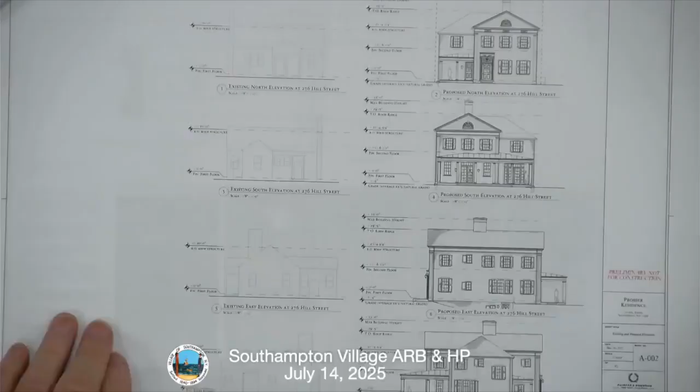And the new house, actually, the old house doesn't conform to the setbacks. So the new house actually is a smaller, narrower footprint than the old house, and does conform, as well as the pyramid laws. It sits more or less in the same location as the existing house, as you can see here.

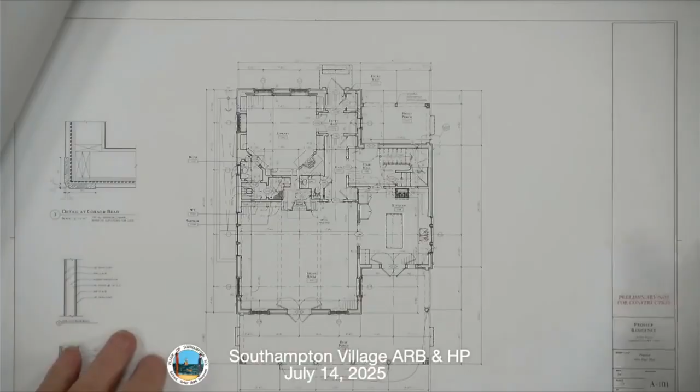Again, these are the plans. I'll go straight to the elevations. As you can see, it's not a vast house. It's basically a gable front house with the porch on the back and a small porch on the front. These are the front and rear elevations.

I'm going to stop there for one sec, because I think we saw this house last meeting. You did, and I think the client was here, and there was two questions. One is a question of the historic report and demo eval, which I'll get to in just a second. And the other was a question of whether you're going to leave the front of it, because was this the house that was part clapboard and then the rest of the house is shingle?

No, it wasn't clapboard, it's shiplap. And there was a question between you and the client of whether you're going to keep that facade request. We were keeping that request.

Okay, and then there was a question of whether the board felt that was appropriate. I apologize for my client, she was on anesthesia and was just coming out from the hospital.

Well, I think the real issue that came up was part of the board were not sure they felt shiplap on part of the house and shingle around the rest made the house look pretty formal for that area versus an all shingle house, and that, I think, was part of the discussion. And I think, if I remember correctly, you felt it was too formal.

Too fancy in a funny way. Well, it's not particularly fancy. Well, compared to the other two you showed at 268 and the other one. Well, those are directly adjacent.

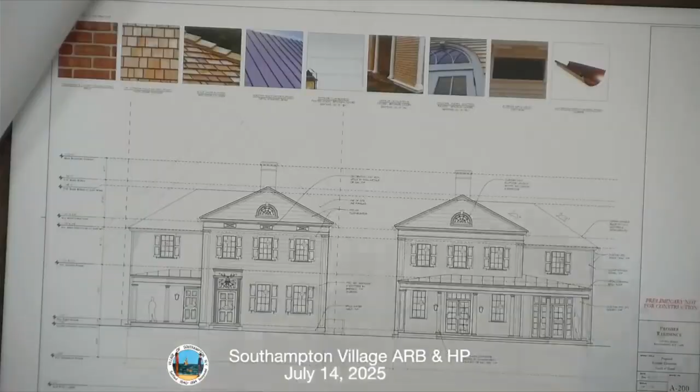Well, I disagree. We want it to fit into the neighborhood. That's what I'm saying. I have an issue that it is, in a sense, more city-fied than it should be.

Well, it is in the village. Yes, it's on Hill Street. I think we know where the house is. It's in the historic district. Because that rendering there...

What's that? Is that a photograph? That's a neighboring house, a house in town somewhere. Well, we're talking about right where it is. Okay, right down the street we have Whitefields. Do you have a rendering of this house?

Okay, we kind of went through this last meeting, so there's only two issues at hand here. The first is, do you have a rendering of this house in its proposed form? We do not. That's not a colored rendering, but we do have a streetscape.

I think our job is to sort of know the houses, and we looked at the house and we've driven up. I don't need to go back to the streetscape right now. The question comes down to, for all the board members, how we feel about having multiple materials, and is it a deal breaker or not? Do you have an opinion? We know some board members do, so I'm just going to ask the board members to give their opinions.

Well, it's very traditional. Jane? I'm fine with the federal style, and I'm okay if they want to do both the two different sidings. I would prefer if it was total cedar shake, but I'm okay with either or.

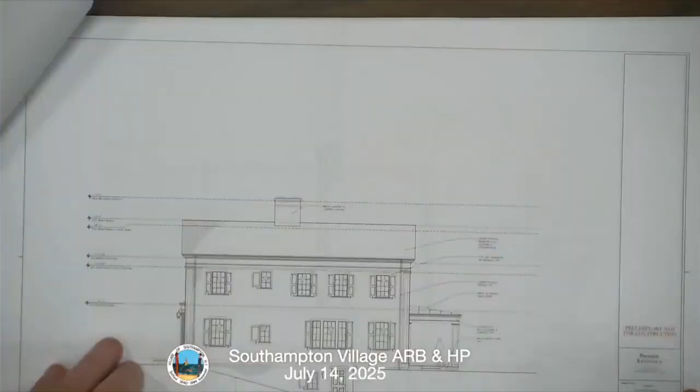The ornament, the round window there, are you picking up on the neighborhood? The round window, there's a lunette. You're talking about a demi-lune in the pediment. That's just very traditional and typical of a house like this.

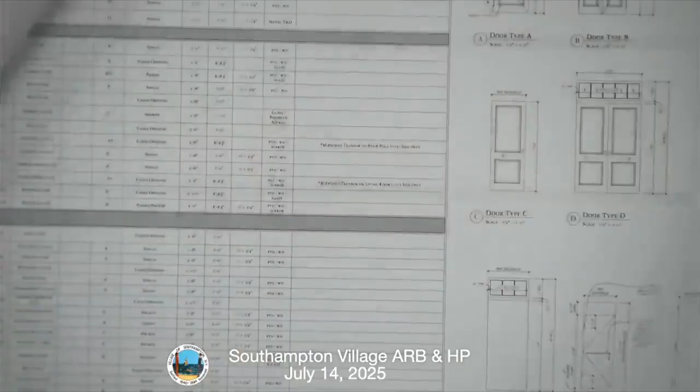Well, I would prefer all one material with cedar, otherwise. Would it be the Imperials with the nails at the bottom? It would be cedar shingles, the ones that you had specified, with one material, not two. Well, again, typically the front elevation is slightly fancier than the sides. I don't know that I agree with that in Southampton Village.

I'm happy to make it all shingled if that's what I'm hearing. I think what you're hearing, and what I'm hearing, is I'm not sure you have the votes for the dual material. If you're willing to make it all shingle, I think you probably have the votes tonight. Wait, votes tonight?

What? Did we vote on the demo yet? I'm about to get to that. So that's sort of where I think you are. So if you feel that making it all shingled, and not shiplap on part of the front of the house, is something you can live with, then I feel like you probably have more agreement from the board, and we'll do the Imperials.

Okay, now as for the demolition, because I feel sorry for this applicant, you've been waiting for a couple of weeks for a historic report, and I'm going to tell you the truth. Sometimes the board asks for historic reports from our historic consultant if we're not sure.

What I heard back from the historic consultant is they were away, I believe they were away first, Alex? I believe he was on call. And then when he came back, basically what he's told us is he's had to deprioritize this house because he doesn't have the time right now with the other work in front of him to deal with a house that he does not consider historic.

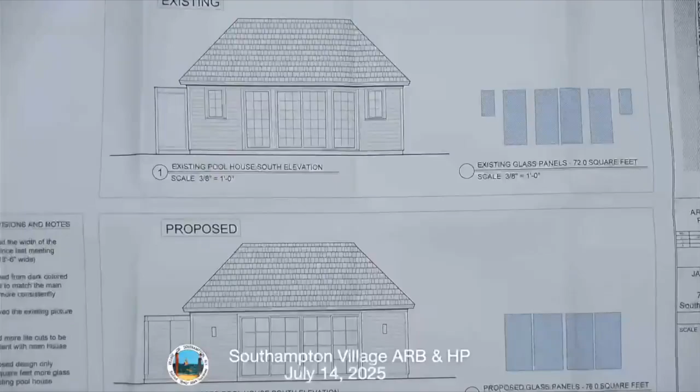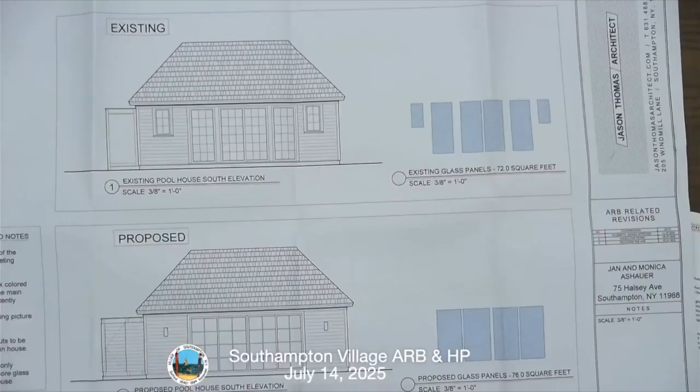And if memory serves, go ahead. We had two outstanding issues at the last meeting, both related to glass doors, one for the pool house and one for the rear of the structure. What you see before you is the existing and proposed pool house, the south elevation of it, so you can see the difference between what exists today and what we're proposing. We actually calculated the amount of glass in the existing building versus the proposed building and found that we were only increasing it by 4 square feet. The board was concerned that perhaps we were adding too much glass to the pool house, so we wanted to make sure we were in line with what's currently there to keep it in the fashion that it already exists. It turns out that we're off by 4 square feet, which seemed de minimis for a rear yard structure.

We also reduced the width of the slider by 6 inches since the last meeting, so now it's from 14 foot wide to 13 foot 6 inches. We switched from the dark colored units to white to match the main house units more consistently. We removed the existing picture windows and added more lite cuts to be consistent with the main house. Our proposed design is 4 square feet more glass than the existing pool house.

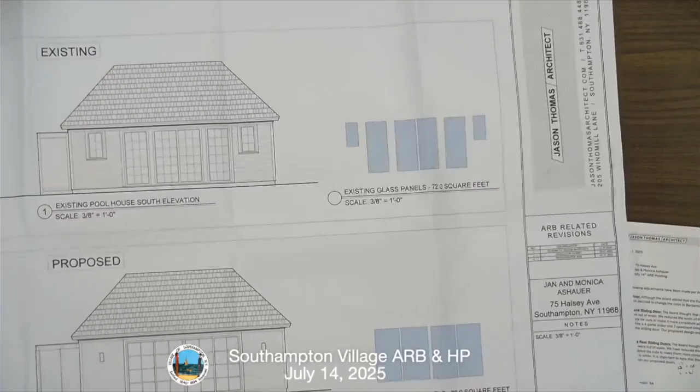So that's the first page of that one. The second...

Now this is the rear of the house. What we've done with these sliders is reduced the width of each by 12 inches since our first meeting on June 9th. We also switched these sliders from the dark colored units to white to match the rest of the units more consistently, and we added more lite cuts to be more consistent with the rest of the house.

I just want to remind the board that this, again, is the rear of the house. There is an overhang over these sliders that's 12 feet long by 28 feet wide, so in terms of light effect, there will be very little light coming out of these sliders.

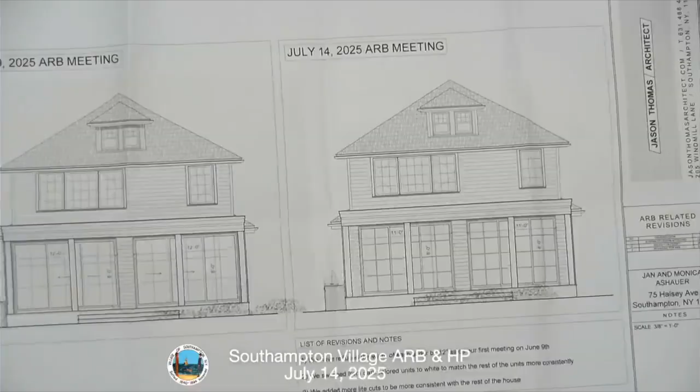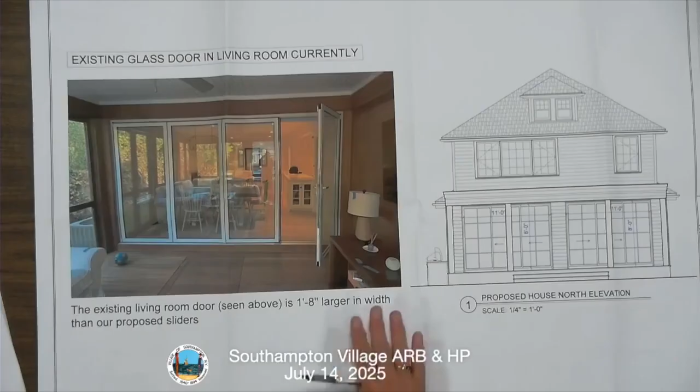This is the proposed elevation of the north elevation, which is also the rear of the house, so you can see it just in one place. And then a picture of the existing house with the existing slider that's there. This slider is 1 foot 8 inches larger in width than the proposed sliders we're asking for today. So right now, when you sit in the living room, you're looking through sliders which go to the backyard through a covered and enclosed porch.

We also did a proposed wall to glass ratio, just to give the board an idea of how much glass is on each side of the building. The south elevation, which is the front, has 490 square feet of wall and 66.5 square feet of glass. On the proposed north elevation, the rear of the house, we have 490 square feet of wall with 208 square feet of glass.

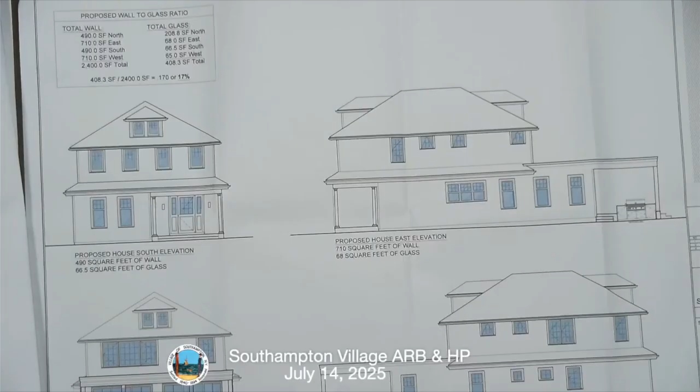On the east elevation, one side of the house, there's 710 square feet of wall with 68 square feet of glass. On the west elevation, the other side, we have 710 square feet of wall with 65 square feet of glass. Those numbers are all under 17% in terms of ratio.

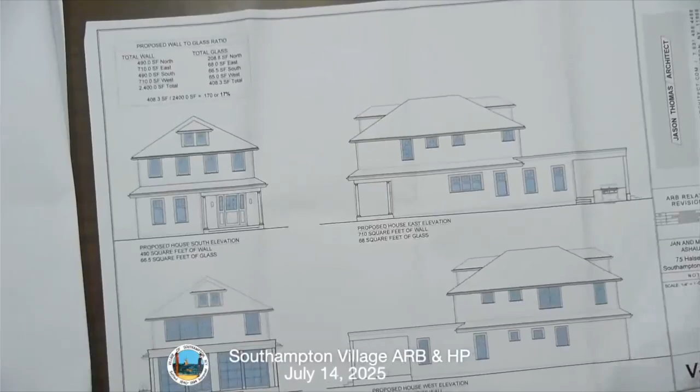That one. Then I also have some renderings for you.

First, the board didn't comment, or didn't want to comment, I think, on the color of the door, but we got the gist that maybe the door color was an issue. I have a sample of it, but I'll show you when we get to the rendering. I'll pick it back up again.

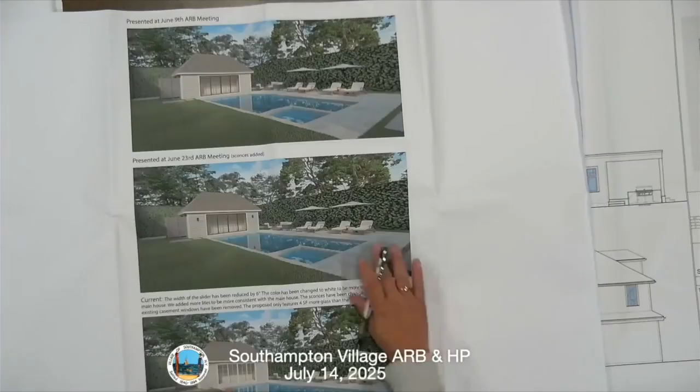This first rendering is of the pool house. At the top, you'll see what was presented at the June 9th meeting. In the second image, you'll see what was presented at the 23rd meeting, which is when we added the sconces. In the current meeting, we've changed the sconces so that they're white.

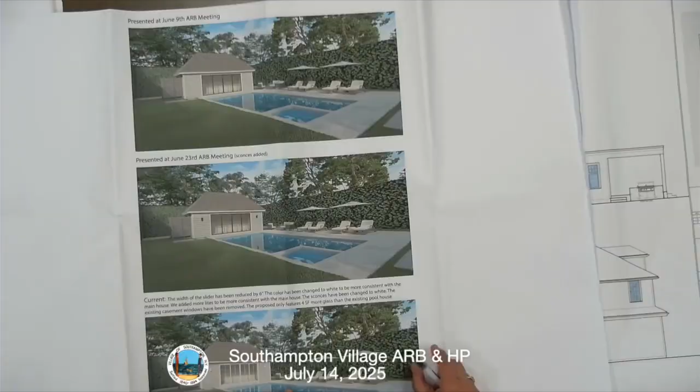The width of the slider has been reduced by 6 inches. The color has been changed to white to be consistent with the main house, and we've added lites to be more consistent with the main house. The sconces have also changed to white, and the existing casement windows have been removed. The proposed design only features 4 square feet more of glass than the existing pool house.

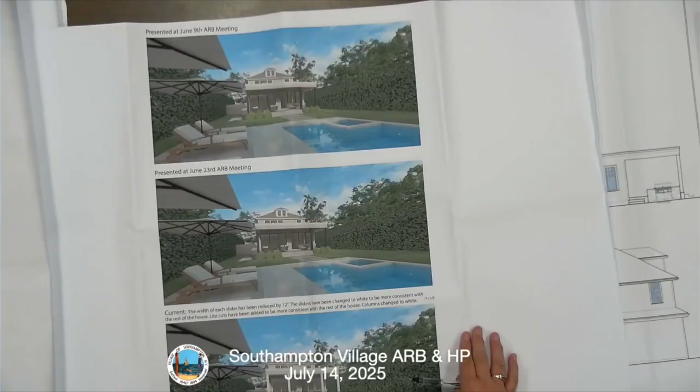On the next set of renderings, at the top you'll see what was presented at the June 9th meeting. In the middle, what was proposed at the June 23rd meeting, and now currently, that's the bottom image. We've shortened the sliders by 12 inches. They've changed to white to be more consistent with the rest of the color of the house, and light cuts have been added to be more consistent with the rest of the house. We've also changed the columns so that they're white as well.

And just a reminder that this is under that 12-foot overhang as well.

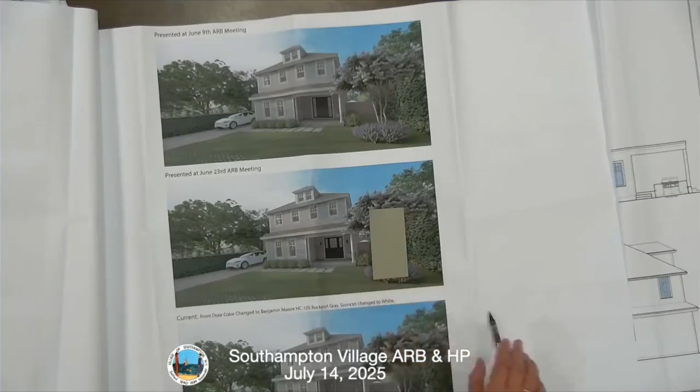This is the front of the building. You'll see the top, what was presented at June 9th, in the middle, June 23rd. Currently, at the bottom, the front door, the only change we've made is that the front door has been changed to Benjamin Moore Rockport Gray, which is the color that I was showing earlier.

And the sconces on either side of the door have been changed to white. And I think that is what I have to present. That's where we are. Okay, board members.

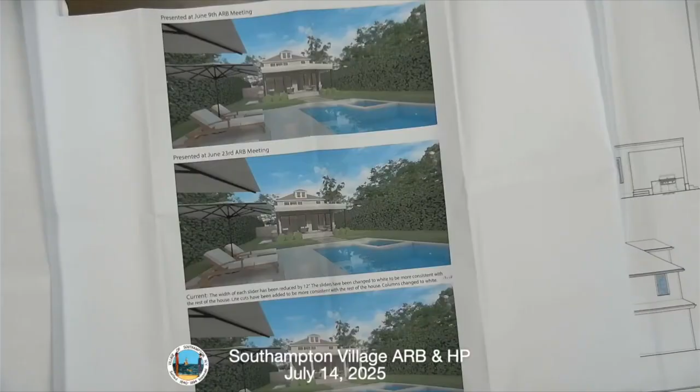I kind of like the dark. I feel it gets too homogeneous with the gray front door, because this is a form that is admired largely at the Village of Southampton. So the gray door, you think is too dark? No, I think I like the dark. There was something other than what I feel is a fairly monochromatic theme. I look back because I don't actually remember saying that about the color of the door. The issue had been when you look at the

molding around the door, and it goes all the way around, and the saddle was also white. It almost looked like a picture frame. It looked unusual. So there was a trim question about it, but I never thought it was the door color itself. That hasn't been changed.

And we questioned not using cedar shake. I think there's a misunderstanding maybe. We don't like that picture frame look around the door. Do you see that, Denise? The frame around the door itself, I think honestly it just looked like they painted the saddle white instead of it being natural, which would be normal.

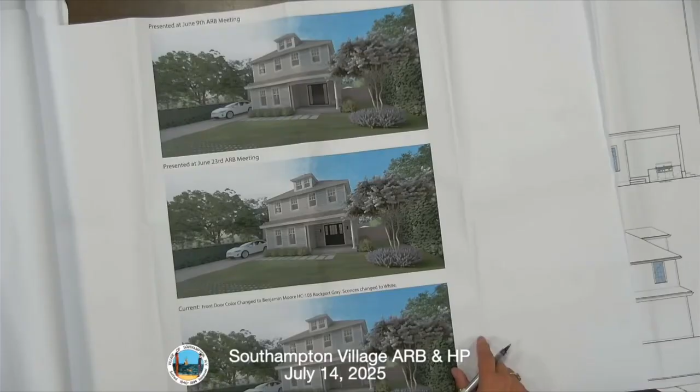I appreciate your quoting all the exact figures, and it's 4 square feet more and it's de minimis and all of that, but I think we are also architectural review and historic preservation, and there's something about design and architecture. It's not entirely mathematical. So for me, I don't care if it's only 4 feet or not, I still think the pool house and the back porch are way too much glass.

Visually, the quoting of numbers doesn't move me. I would agree, for this neighborhood and this small of a lot, that it's a very enormous amount of light in the back of the house, even with the 12-foot overhang over it. I would definitely rather see cedar shake, and if the door was gray or blue it wouldn't really matter, but having gray siding and a gray door doesn't really seem to make sense to me.

Refresh my memory about that enormous overhang. It doesn't have a door to it, so it's not enclosed, it's just a roof. Right, it's a big 12-foot roof for an outdoor patio. It doesn't have access to it.

From an energy standpoint, the north glass is not efficient at all, north-facing glass, I think that should be reduced. On the house, you're saying? Yeah, I think the amount of glass on the north should be less than on the south. The pool house is facing south, so that makes more sense.

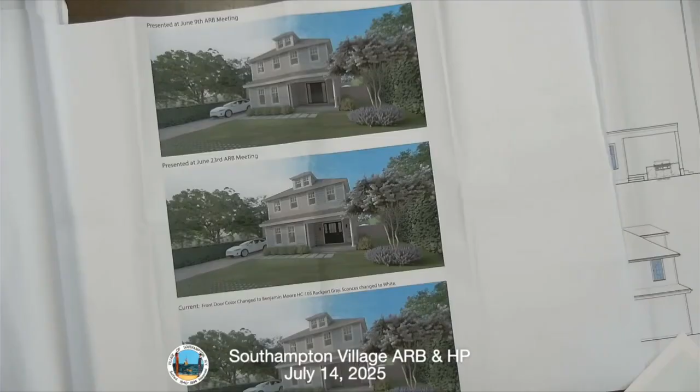to white, the windows to white is harmonious and looks better, and it's more typical of the neighborhood. I'm hearing, and I kind of agree, that it's not just the amount, but the size and the scale against the wall of the windows and the window openings just feel out of balance to the walls in which they're existing.

And now that you're redoing it differently anyway, the way they will operate is different. So it's been sort of an expression of the board from the beginning that those windows just need to come down a little bit, and I just feel like the scale balance - there's just something that feels heavy.

In the pool house, if you look at it, before when you had 4 panels that were smaller, and you may have had more glass because you had 2 windows, but the window-wall ratio on that wall looked less contemporary, more harmonious to the overall structure, especially to the traditional neighborhood and the traditional house, which looks quite nice. But I think that's what the board is looking to see, and I think that's what I'm hearing.

So, on the front, what we don't like is the white picture frame around the front door, is that correct? Right, because it looks like a saddle. I agree, it looks like a saddle. That would change it completely. If the saddle were wood and not white, it may be the rendering, but it looks white. Okay, that's where that really came from.

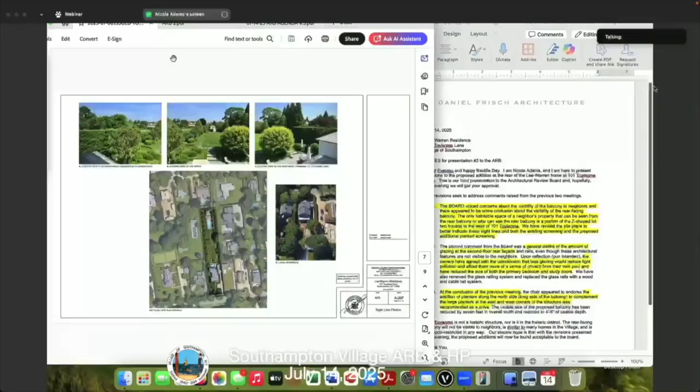Okay, sorry. So last time there were some concerns about the visibility of the proposed balcony with the neighbors, and I just want to clarify because I don't think I was clear last time. The only visibility from this rear yard to a neighbor, or a neighbor back to them, is on the west side. There's a Z lot right here, and I can show you, we did a better diagram.

So 2 houses to the left, there's this kind of Z lot, and the only visibility between neighbors is about 175 feet to this pool and the rear of this house. The neighbor to the east, there is no visibility at all - from their roof right here onto the east, there's nothing. This is their backyard over here, and this is what you can see from that neighbor to the west. And that's not based on line of sight, that's based on vegetation that's blocking the view?

That's vegetation. Okay, thank you. So, what we proposed last time - we proposed more things, but we just wanted to be clear, because I don't think I was very clear last time. We did propose to continue that screening and block whatever was open in that line of sight.

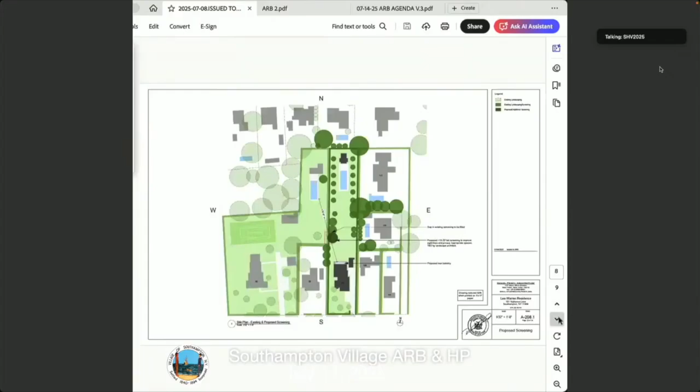There was another point brought up about the lighting and the glass, there being too much glass. So, reviewing this with the owner, this was what was proposed last time - there were 3 panels in the study, 4 panels in the primary bedroom. They heard you and agree, and actually think for themselves too it would be more private. So what we'd like to do is reduce - we took away a panel for each opening and reduced them quite a bit. So there's just 2 panels in the study and 3 panels in the primary.

And then finally, I believe there was a recommendation to use planters. We had proposed planters previously on the side, high planters, and then there was a recommendation to include planters on that back patio, on the back balcony. We reduced the use of the balcony in size quite a bit, and are proposing planters along the back.

Can you give us the depth and width of the balcony, please? There's 4'6" of depth. The overall width is about 25... I was looking for last week's documents. It's 35 and a half, and we're taking away 7 feet. It's 27 feet interior and 4'6" interior.

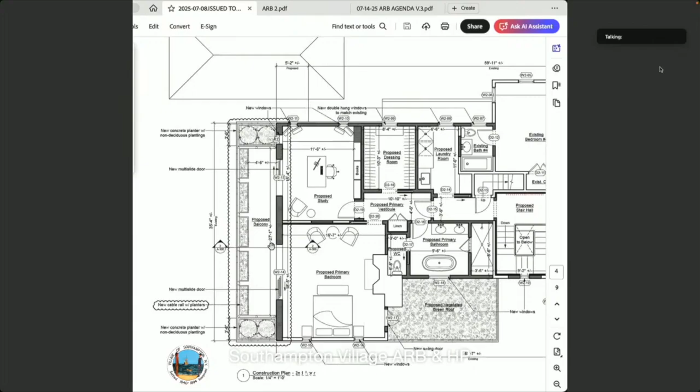So in looking at the site plan, there's another house over that hedge, literally to the east, right? From your house, 101 - I don't know what the number is, 115 maybe. So to the east there's a house right there. To have that balcony where people are sitting out talking, there's a structure right between us - there's an existing garage, but that's set back quite a bit.

Well, it's not a 2-story garage, is it? No, but it's still... And it's a very slight balcony. It's their primary bedroom. I don't care what's happening in the room - I care how the buildings fit together on this street with narrow lots. And there might be noise pollution too - noise, light, and I don't even understand why you need such a wide balcony.

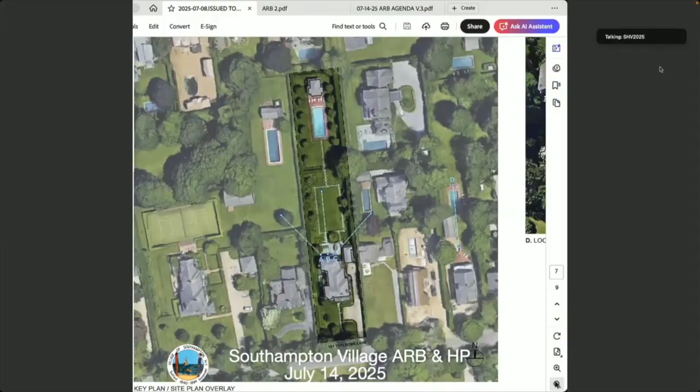That's a big one, it's huge - 27 feet. How long is this room? Probably 27. I don't get it - to me it's excessive. And I think because of the way the houses sit on the lots, it's unnecessarily invasive, or could be unnecessarily invasive. That's what I think.

Other board members? I don't like how it looks so much either, but it's in the back. I agree with both those points - the way it looks, less so. But that's enormously large - 4.5 feet by 27 feet, in a very narrow, tight neighborhood, and it's tight on both sides.

I agree. So you have the light pollution, and then you also have noise and people up there. They may like to entertain in their bedroom, so if it's the master bedroom, that's irrelevant, really - they could be people that like to have a party in their bedroom, so that's kind of a moot point. I think it's just too big, and I don't think it's appropriate for the area. I don't think there's anything that's gonna change to get my vote.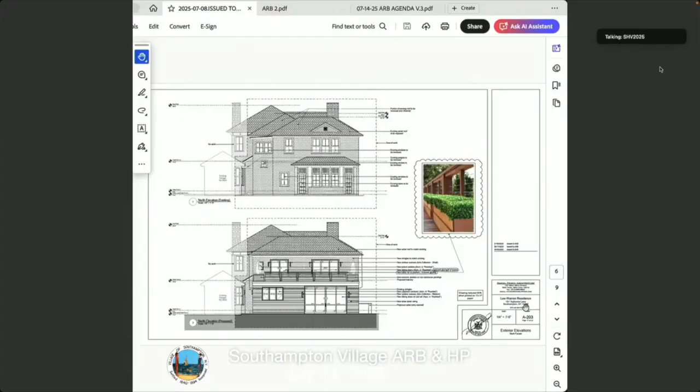Okay, Jane? I agree that the length alone - if it's only 4 something wide, but 27 feet does seem excessive to me for the size of the balcony. And it is a very narrow lot. They're all narrow right there. Nina? I would say that if the purpose of the balcony was to have morning coffee, but it seems to me that it's more than that.

But I don't oppose the idea of a small balcony where you can have a small table and a cup of coffee. But this seems to be more than that. I mean, could you do 2 small balconies?

The impetus for the balcony in the beginning was that we bumped out the back of the house to get a kitchen there, and we didn't want to do a whole full 2-story, so it was actually to have a more diminutive addition than to actually be. Well, it can just be a roof then, and it cannot have access, that's fine. You're saying the first floor bump out actually goes out 12 feet, and you're looking to take the entire roof that's over and turn it into a balcony. We didn't want to go full, the full.

I totally get that. Here's what I think I'm hearing, and then we'll go to public comment.

I think there seems to be a universal opinion that, because this is an interesting street, because a lot of the lots like this are deep and some of them are short, and every other lot has a different depth on the street. But when they get very narrow, the real concern here is light and noise and neighborhood privacy. And it seems to be pretty universal. There's a big concern about the way this is designed. I think if you can figure out how to set the balconies back, or figure out how to do a smaller Juliet over a portion of it, you might get a little more acceptance. But right now, it's just too much usable square footage on that second floor, so I think you need to rethink what that second floor square footage can be, because the rest of the house, we seem to have complete agreement except for this one area.

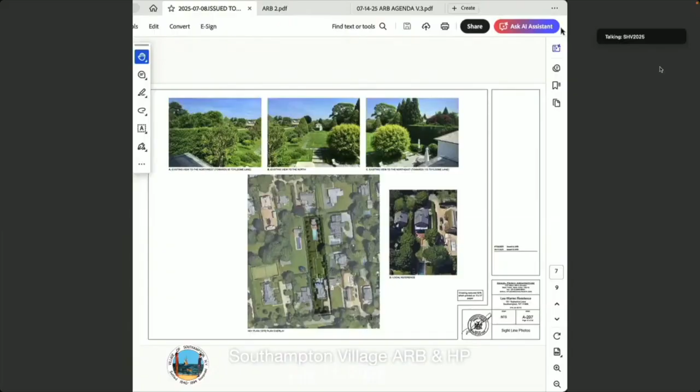Okay, so are you hearing that? Yeah, okay. So do you think you can rethink that and talk to us on July 28th? Let me talk to my clients. Would you like us to adjourn to the 28th? Yes. And then if we need to adjourn further, you'll come back and tell me. So I'm going to motion to accept the client's request for adjournment for 101 Toilsome to July 28th. Is there a second? Second. All in favor? Aye.

Thank you. That brings us to 1430 Meadow Lane.

Please. Hello, John. Hi. In the mic. Have to hear you.

We were here the last time, and the board was concerned we had a large bit of glass, and what is pretty much the gym. There was a bank of 6 attached glass doors and windows, so at the board's direction, we significantly lowered the amount of glass and made it, we just have these flanking 2 banks of glass doors.

This is, the property's about 300 feet from the street, and we hope that the board agrees that this tones down that, well, that would be, I guess, the north facade there, the front of the building, in a satisfactory manner.

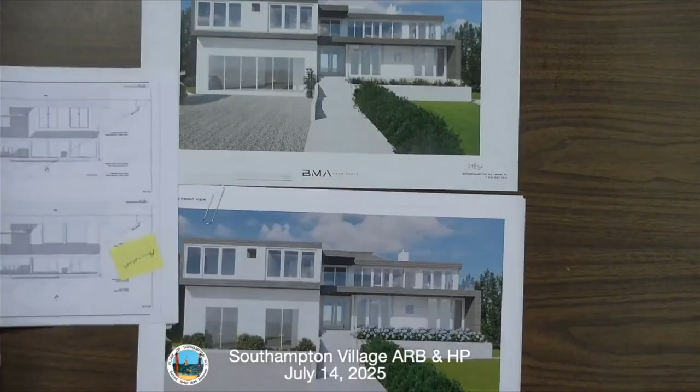It's the front view, that's the rendering. It's where the elevation is A200, so you can see what it is in elevation. And there's the before and after.

So far it's going well because we can see it. They changed it, huh? Turn those back the other way. They keep changing what you're supposed to do. No, we didn't, it's correct. Oh, that one, yeah, good. I think that's just to keep me on my toes. You know, it's good to have a goal.

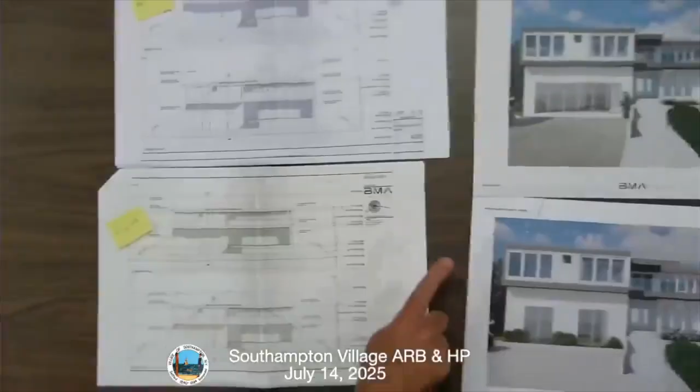It just flipped around. So this is before and this is after, and that's before and after in rendering. The above was the last meeting, the bottom is this meeting.

Wow. I think it's much improved to have the wall between rather than have the four. I think it looks better all the way around, and thank you for listening.

I agree. It was described as a garage in search of a house last time. Now I actually believe it's a house. I think last time we channeled Peter DeWitt and said gaping maw. I think it looks more like a cohesive house without that big opening. The first thing you saw was, I mean, it was a garage in search of a house, so I think it's much improved. I miss Peter and his rhetoric.

Nina, any thoughts? I mean, I think the original was intentional with the architect to keep sort of this blank wall and then all the glass sort of receding, and I feel like it's losing its rhythm architecturally. But it's less glass than before. I appreciate the greenery, but from an architectural standpoint, I feel like the balance and rhythm between glass and solid is being compromised.

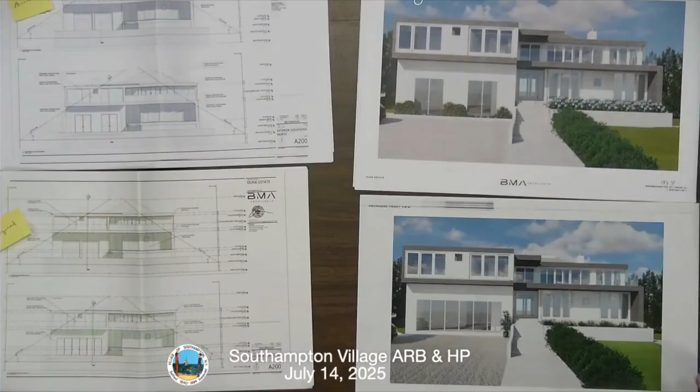I'll just point out real quick that the new alignments between the second floor and the first floor are now aligned top and bottom. I think that creates a nice rhythm on the front elevation, and it plays nicely with the scale of the house. I think the house is much improved from its existing state. It's night and day, I think it looks quite attractive. I have no issue with it personally.

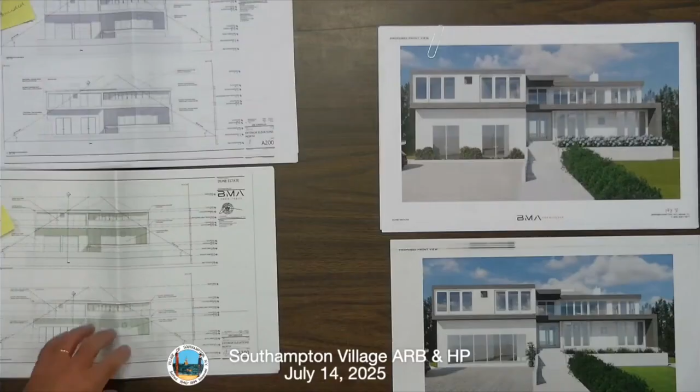Are there any comments from the public? We certainly have an interested public tonight. Can you blame them?

All right, so I'm going to motion to accept the application for 1430 Meadow Lane based on drawings presented July 3rd. Do I have a second? Second. All in favor? Aye. All opposed?

There you go, okay, thank you. Thank you for listening as well. Of course, we appreciate when people take it into consideration, come back and address politely. Thank you so much, I always listen, sometimes my clients don't like what you say. We know that, John. Good night, everyone. Good night.

Okay, so that takes us to new matters where you do need affidavits, and they do have to be in order. So my first one is Summit Trust at 234 Wickapogue Road. Do you have the affidavits, and are they in order? Yes and yes. Okay.

I have a question before we get here. Was this noticed? Yes, it was noticed. Was it posted? It was posted, but the materials, we got nothing except for 2 pieces of paper. We didn't get a rendering, we didn't get a drawing, we got nothing except for 2 pieces of paper. I don't even know if I did that.

We're just only asking to change the previously approved natural shingle to white shingle. Well, but part of that decision is visual. So without presenting us pictures of what the house looks like in its accepted state, and a vision or representation of what it would look like in the alteration you're asking for, makes it a little bit difficult for the board. I want to put that on the table because all that was presented was the application and a piece of paper. There wasn't a sample, there wasn't a color, there wasn't a drawing, there wasn't a rendering, there was nothing to look at. I guess the mistake would maybe be a miscommunication with the building department.

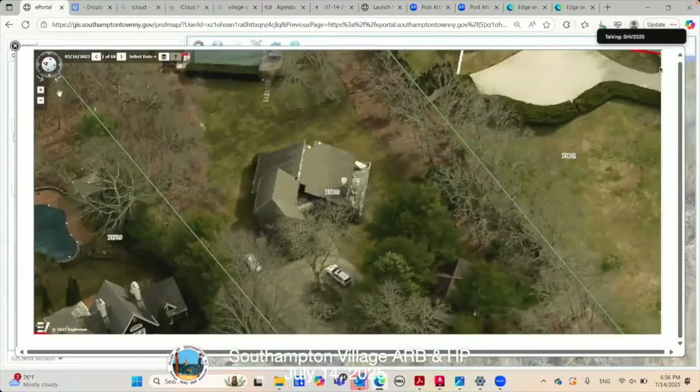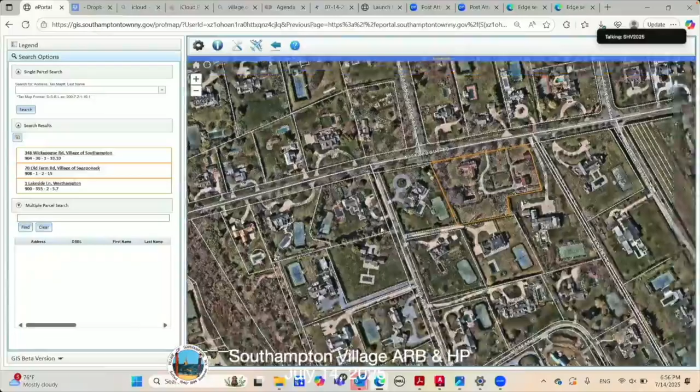I think the shingles, we were very happy with what we approved the last time, and now it's becoming like, so the houses that you show, the white ones, are these new houses that they've just put up a little farther to the north, and it makes it homogeneous in the neighborhood, which is really not the idea. I think it's detrimental to the neighborhood. Yeah, I agree that natural shingle would be preferable. Great.

Okay, are there comments from the public? So I think what you're hearing is that the board is not in favor of doing the house with the white bottom and the natural top. They'd like it to stay where it was in the approved house, which was natural shingle.

Okay, let me talk to the homeowner and see what her thoughts are. Okay.

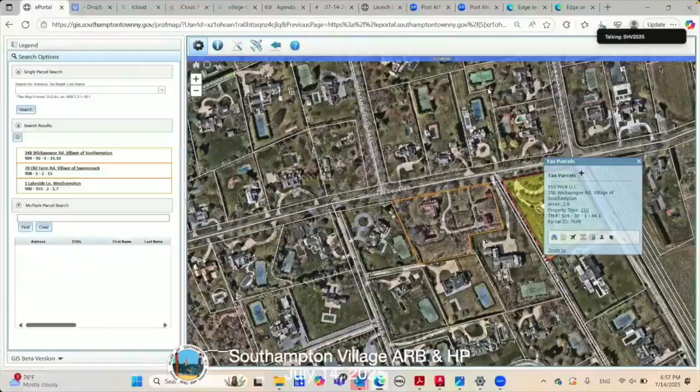So actually what I'm going to do is make a motion to deny the application for 358 Wickapogue Road to modify from the previously approved shingle color. Is there a second? Second. All in favor? Aye. Okay, thank you.

Thank you. Okay, that takes us up to 175 Miller Road. Do you have affidavits and are they in order? Yes, and yes. That was a quick one. Good.

Yes, please, if you can get to me. I love this little setup. Thanks, Rick. Hello, if you'll introduce yourself, please.

My name's Rick Tolkowski from Peter Cook Architect. We're representing the client. Sorry, we have a problem tonight, I don't know what. Usually we can hear. Can you hear me well? We also like to keep Jackie happy so she can hear it. So it's going to be, okay, so I can start?

So our client recently had some extensive water damage to their home, which required removal of all the interior finishes down to the studs and the subfloor. So rather than replace the house in kind, they thought it'd be a good idea to take advantage of an unfortunate circumstance and reevaluate the program and the floor plan.

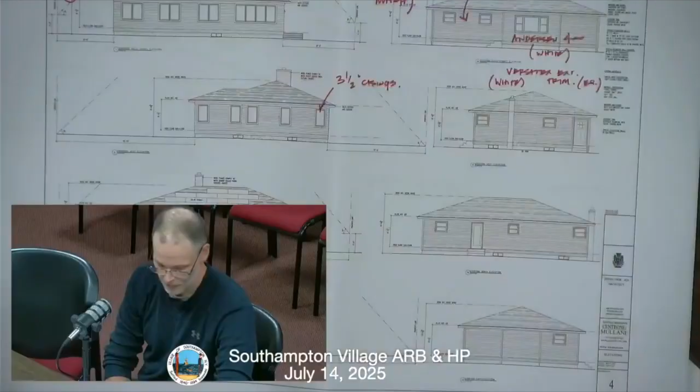So all the roof lines and edges will remain proportionally consistent with the existing, other than a change of material. The proposed landscape plan and survey shows a line of existing Leyland cypresses on the east side of the property and hedges on the north and west side. We're proposing some boxwoods, lavender, and hydrangea foundation plantings on the front and side elevation.

Did you give us the landscaping? I did. It's sort of on another page. I have it with me, I think, like in another folder. Not extremely extravagant or colorful by any means, but it shows what's happening. Well, can you show us at least? Yeah, of course, just give me a second, please. I don't see it in my packet.

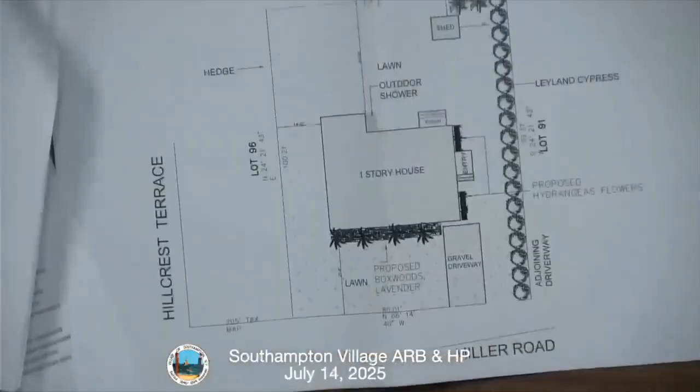Is there a rendering? There's no rendering. No, I didn't get that. Oh, I guess this is it. Yep, okay, it's just here. Oh, she has it. Apologize. Okay, that's the landscape plan. Thank you, here's the one.

Okay, just take us through the color, please. Take us through color, all the way around. Did you mention color? The color is mist. Cement, yes, okay. Sorry, I missed it, we were shuffling papers. The color of the house, you're talking about the color of the house? Yeah, same color. The color now is like a seafoam green, but it's gonna be gray. It's gonna be gray. Yeah.

Another gray house with white trim. Okay. Board members, questions?

So, are there solar panels on the roof? There are, not now, they're proposed. There will be. You're proposing to put them, correct? I included a plan, I think, of the solar panel. Yeah, I saw that.

Is it on the front of the house as well as the back? It's on the front and the east and west sides. It's a small roof, so they had to use the majority of the roof for the solar panels.

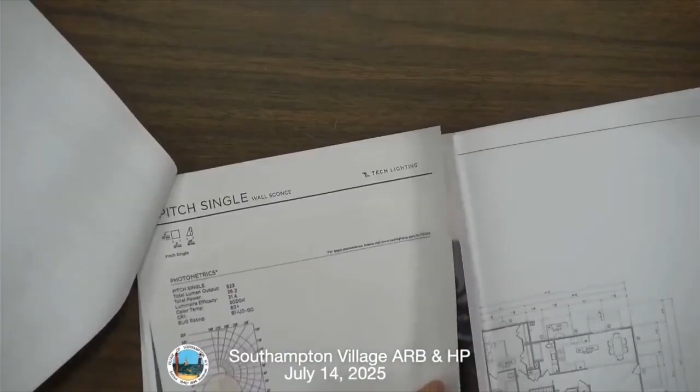I don't know what to say to that. It's slightly foreign to me, frankly. Not a lot of people propose putting panels on the front. Well, it really depends on the direction of the house and how much it's chopped up. We haven't seen a lot of it, so I don't know what to think of that.

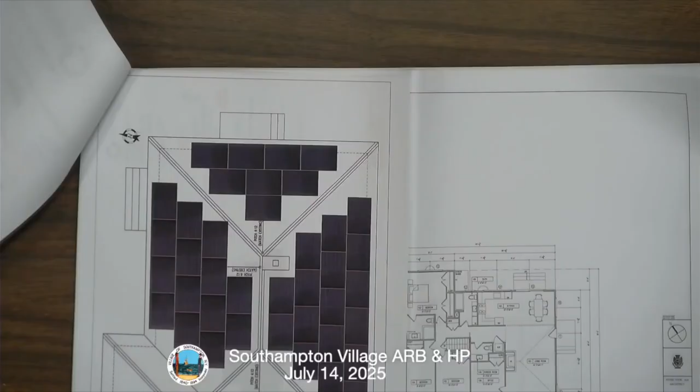Other board members? Is there a before and after elevation? Yeah, it's on the elevation page, before and after, right next to each other. I think that's what's requested from the board. It was small on the print. On page 4? Yeah, got it.

The left side is proposed, the right side is existing. So this is the proposed request. Where's the front door? Is this the front comparison? This must be the front door, yeah.

Oh yeah, I saw that. What kind of a front door is that? We're just seeing like a, it looks like plain glass. At this point, I'm not sure what the front door is going to be exactly, I can't tell you for sure. I didn't want to propose something. It's going to be somewhat solid, partially glass, but I can't tell you for sure. That's why I just left it blank.

Here's the problem - the door is also on the side of the house, which nobody's going to see. Well, here's the thing: the reason we go through this process is so we know exactly what a house is going to look like, and the neighbors know exactly what it's going to look like. One of the things included in that is what does the front door look like. So we actually do need to know that.

Okay, but you should also appreciate that we're a year and a half or 2 years away from building this house, and they haven't made a lot of decisions. I'm going to stop you right there - I actually don't appreciate that, because people come to this board with a plan of what they intend to build, and then we approve what you intend to build.

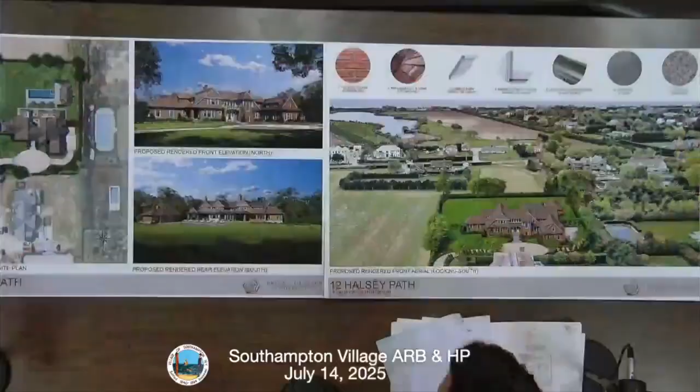It's just a green field. Okay gentlemen, if you'll introduce yourselves for the record. Yeah, it was. It's sweet. A large part of it's going to remain.

Okay, if you'll introduce yourself for the record, please. Neil Martin, counsel for the applicant. Thank you. Brian Glasser, architect. Okay, and make those microphones your friends.

Good evening board members, my name is Brian Glasser, I'm representing the owner at 12 Halsey Path. Just to give you some information on the lot, we're currently located at the end of the cul-de-sac, on the south side. The lot is currently 61,884 square feet. This is part of a subdivision, and currently a vacant piece of property.

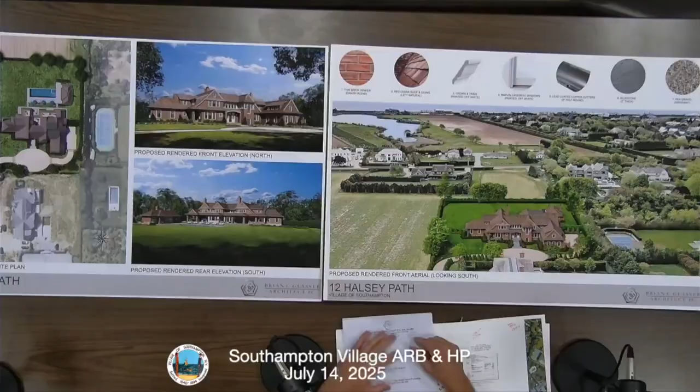Moving on to the architectural style my client is looking to go with, we went with a shingle style home. The design uses natural wood shingles on the roof and siding. With a shingle style house, we went with complex gabled roof lines, which have a 12-on-12 roof pitch. One of the challenges we tried to address is bringing down the massing and volume, which I've seen in your guidelines for certain styles of architecture. We were trying to give the house more of a horizontal feel, so you'll see us bringing the roof line from the ridge all the way down to the first floor with a horizontal band wrapping the entire house.

Some other items we did to magnify the horizontal feel versus a vertical look: we used larger roof overhangs. We also included wraparound porches, which had shingle roofs to bring in the roof decks and make the walls on the second floor appear smaller.

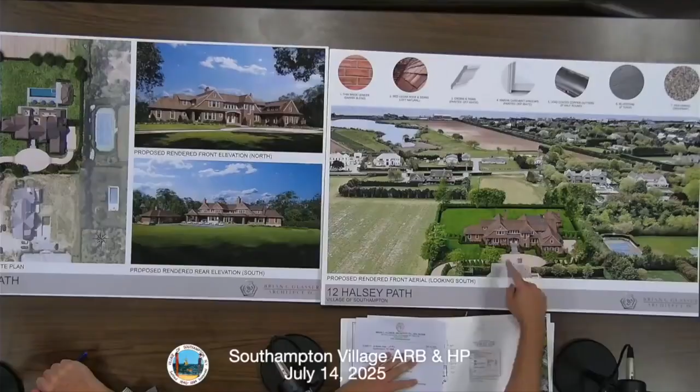We also did an attached garage to the west side of the property. In the front, to highlight the main entry, we introduced an arch top, Romanesque arch over the front entry, and a turret where the staircase is.

Going on to the materials we chose to run with here: on the roof, we're going with a tapered sawn red cedar. Gutters and leaders will be half round gutters with round leaders, and lead-coated copper is the material we'll be using. The siding is also going to be a red cedar perfection shingle with a 5.5-inch exposure. The chimneys will be a Danish blend brick veneer.

The windows we're choosing to go with are Marvin Ultimate, which is aluminum clad, in their standard white color. All the trim is around the windows. The fascias are also going to be an off-white to match the window color.

Columns, we are going with a tapered shingle column. Patios are going to be a bluestone material. The covered patios and the patios around the pool will be bluestone, and we're going to do brick risers in the front around the entry.

Railings will also be, you'll see on the back where we brought the roof line around to bring in the scale of the decks. We have a shingled roof coming up around 3 feet, and then a smaller railing system just to meet code for railings so someone doesn't fall over.

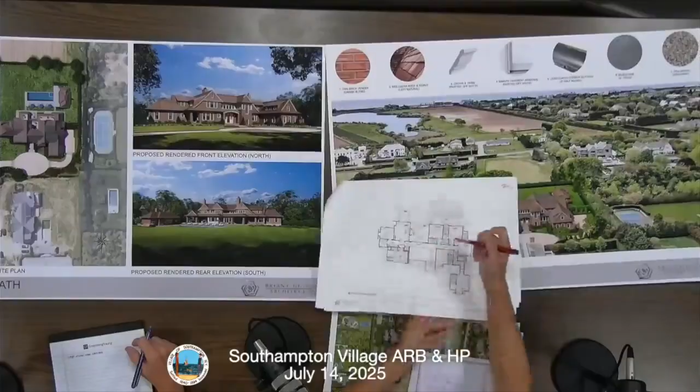Yeah, so we did bring the roof lines to address that. We did bring the roof lines in. You'll see the footprint of the covered patio below. We did pull them in to a certain point for the architectural proportion to look correct.

The size of the roof, those spaces are roughly 10'9" by 13'4" for the primary or master bedroom. And then bedrooms 2 and 3, they have a common deck that is 34 by 9 feet.

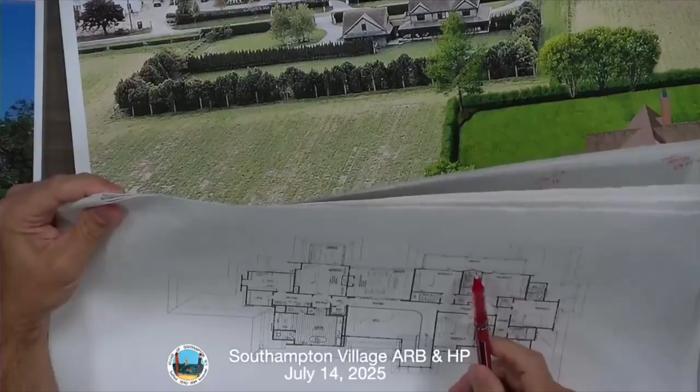And I do know from past projects in the village, in tighter quarters, that it was a concern. So you will see on the west, which would be the closest neighbor, even though it isn't developed over here, we do have a roof line that comes up quite a bit higher. So there are things I try to respect, I've had comments before from the board about respecting the neighbor's privacy. That was one of the big things here, which I was hoping on a bigger piece of property I could make that work and make the architecture look correct for myself. That was a little bit of a balancing act for me, so that's kind of where I stood with that.

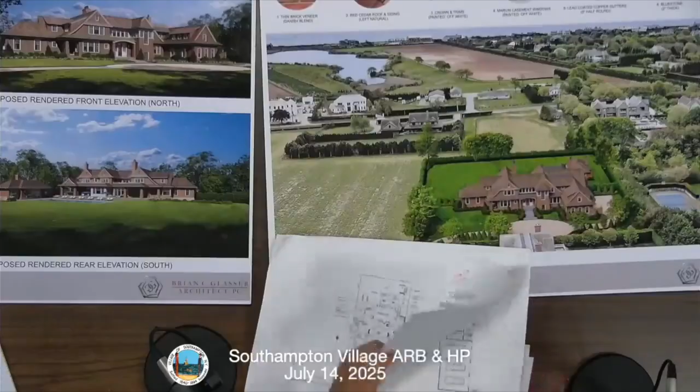Well, I think you've done a great job. Overall, I think the house looks great. I had the same question about the window in the front, and is that a basement window? Because it seems to be below the grade. Yeah, in the front there, that was the only thing that caught my eye.

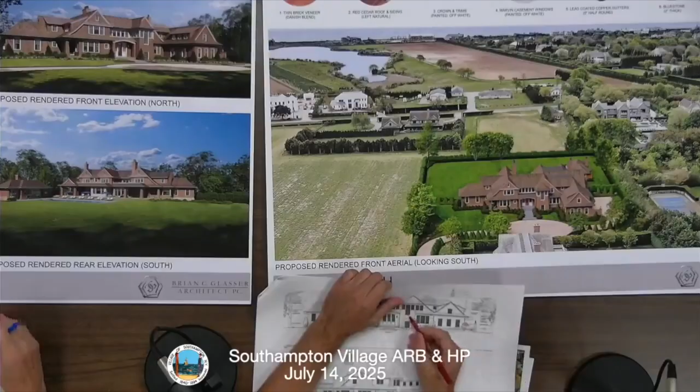So it's a little deceiving if you look at the rendering—that's just for presentation purposes. If you go to sheet or page 6, you'll see the landing where you'd be standing is roughly right where the tapered shingles underneath the window extend to. Your sill is roughly at 3'6", so your head would be sticking out right at this point.

So the landing is lower than it might appear. This is the landing, and this is like a person sticking their head—that's about where their head would be.

The bottom portion of that window seems to go into a basement. Yes, it does—that's called a light well. It's letting natural light in, and here's another landing going down.

So these are the stairs going to the basement level. If you're a person standing here, your head would be somewhat in that area. This could be a house too—person standing here, kind of like that area. And okay, if this is the front door...

This comes out to the driveway even farther than the front door—this landing comes out slightly. Yeah, that tower, it's not working for me.

I would think you'd want to make the basement more recessive. So it's just this little area here that sticks out about 2 feet.

You're talking to the microphone. Sorry, our fault. No, it's all right, I get sucked into the question. Pull the microphone toward you so it doesn't kill me.

So basically you're coming out around 2 feet for this turret, and in the guidelines, with the shingle style house, they do like those little elements—it kind of highlights the entrance.

I've gotten denied on 2-story glass elements before. This to me was trying to do a little bit of a balance between the two. If we just did windows, maybe a larger transom at that landing—when you come up to the staircase, you'd be looking at a wall, and the windows would be so high up you wouldn't see them. So that's where this kind of came from.

Over the front door and then to the right, there seems to be window congestion—there's a big 5 windows over the front door, which I think is handsome, but I don't think that's helpful. It sort of takes your eye off to the right to the long window on the second floor. I couldn't tell you what to do, but I think it's congested. Overall I think you've made a handsome house.

Right above the entry door, yeah. Sorry about that, thank you, they're talking about it right here. Sage, you guys got me again.

It's also north facing, so it doesn't make sense to have too much glass north facing. You're not going to have the balcony south facing light blasting in and letting too much light in there. To me, having north facing light at a transom level, it's not going into a room, it's coming from above, so it's just letting some natural light through.

It's probably blocked off, not like a spotlight coming in. You have plenty of windows in the south still—just trying to find out. That's strange, really.

The biggest thing is on the back—we have all covered porches. Oh, well that's good, it's great.

I just feel like if you take a step back and look, my eye goes somewhere—you haven't gotten me yet. Or I feel like there's something right here, or right here.

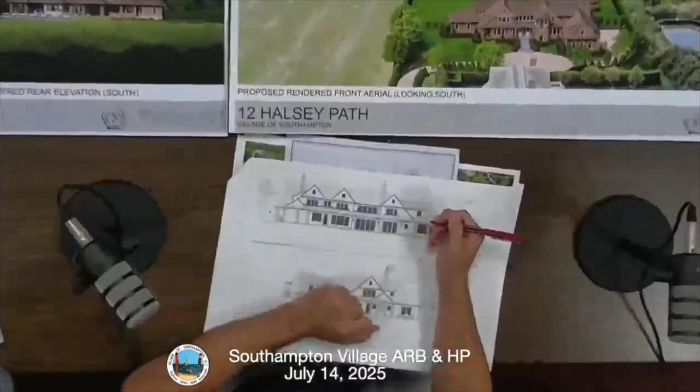I think you've heard the concern. I think you're not getting a warm, fuzzy response to that great big terrace between the 2 bedrooms, which you probably didn't expect you would, because we've been here before. Yeah, I feel I knew I was pushing it a little bit. I feel like you'll come back to us with another solution, that's why I feel like it's going to happen there.

Comments from the public? Okay, so to go back, the terraces, the tower, and the light situation - I don't know how everybody else feels, but I think the arts and crafts tapered column thing is out of character with the house. And I know it's your signature, but I don't think it works on this house.

If I reduce the light exposure, are you okay with the volume? Just because for me to redo the actual staircase, you can see how it's kind of intertwined. If I reconfigure it, is that something that works?

To quote Alice Cooley, my friend, I cannot predict the future. So I can't actually tell you what we're going to say to what we see.

All I can tell you is what you're hearing, what the concerns of the board are. One is that the tower, or turret as you described it, might not be the right answer there. And I think the glass, which is the overhead light for the stairwell, would be just a great big old light box. We've had this happen before where somebody said they wouldn't, but then hung a great big chandelier right in the middle of that and lit up the neighborhood. So I think that's the concern you're hearing.

All right, nice. So when would you like to return? Yeah, we'll adjourn. I'm going to be away, so don't apologize, but here's the thing. We're going to get on it, and then if we can get it to a point where...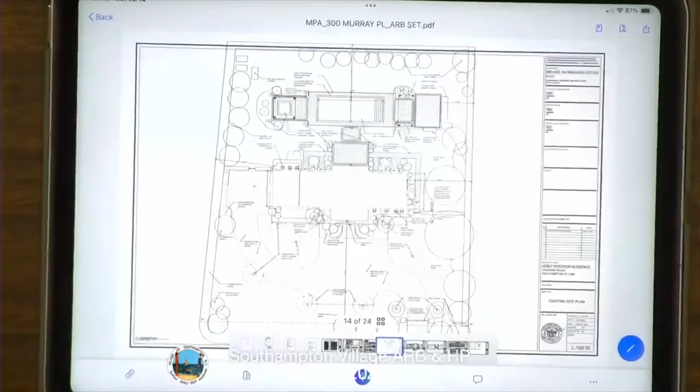G103 is the neighborhood, which you mentioned is mostly hedges and gates, very tall hedges. L100 is an existing site plan. That site plan shows, as you see, you enter the property from one side, cut across in order to get to the garage, and there's parking in the center.

I will just go to sheet L101, which is my proposed site plan. This moves the driveway entrance over to the other side of the property. It now aligns with the driveway to the neighbor immediately next door, so the driveways are kind of next to each other, which is a nice feature for neighbors, but also reduces the amount of driveway parking impervious surface by quite a bit, about 30%, and allows us to do a garden at the front of the house.

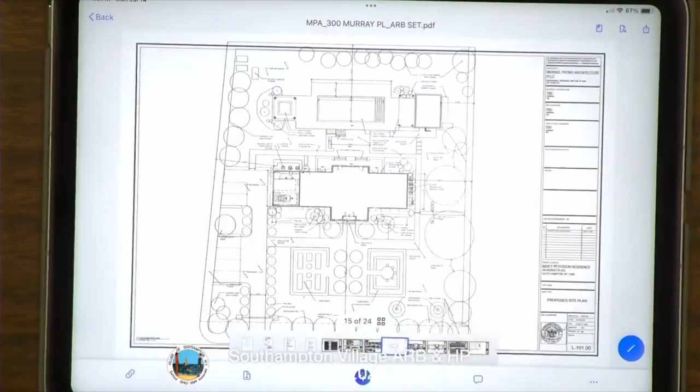In addition to that, there is an expansion of the hardscape at the back side of the pool so that you can fit a lounge chair.

I'm going to skip the plans. The plans are mostly some sort of minor interior renovation work, and I will go to the elevation sheet starting with A200. The current house is clad in a white HardiePlank board and a face brick on the center tall portion of the house.

We're proposing to remove that material to provide a new envelope on the house, and then replace it with eastern white cedar, no coating. This house is fairly close to the water, so within about a quarter mile, you get the nice silvering of the shingles, particularly with the eastern white cedar.

And the roof is also a cedar roof. The roof will remain. The roof is in good shape.

The windows will be replaced with an IZ rated window, which is a higher lateral load resistant window because of our location, but otherwise they will change to a double hung. So a little bit of a difference in the window type, but otherwise very similar to what's there. The muntin pattern, the sash sizes, those will all be in kind with what is there.

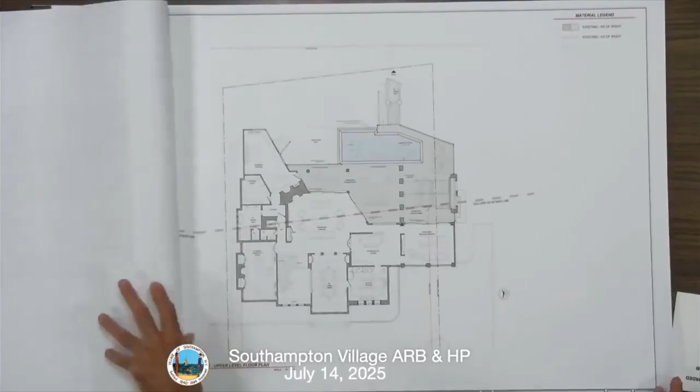So, wait, we reviewed this once before? You have reviewed this exact thing before. So we approved and reviewed this house in a manner that did not require the variance. Correct - they continued with their variance, got the variance, and now we're looking at it again in the version of the house reflecting the variance as it came through. Correct, that you're right - we've lived with this house a long time.

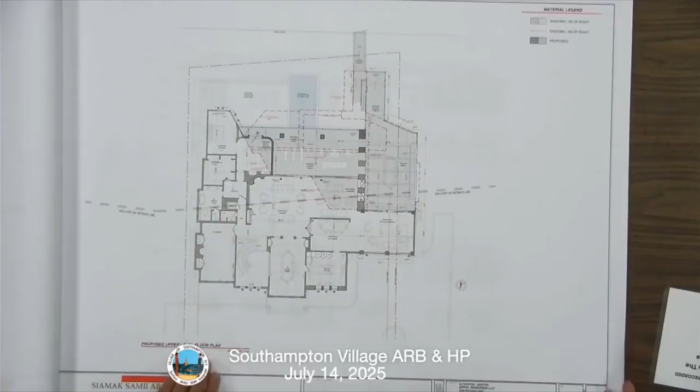The bulk of the work - I was on the ZBA, don't tell me. So why don't you just tell us what the change is, because this is where your big changes are, right? I'll take you to a rendering - I think that's the easiest way to understand. It's page P1.2, towards the end of the package.

I have it here in front of me on the screen, if you want to take a look. This is basically the crux of what's being proposed - the rear of the property facing the ocean. A version of this was approved, and now we're adding some GFA that was part of that variance requirement. You can see on the following page where the orange is all existing, and in white is what's being added on to, shown in various angles in the following pages.

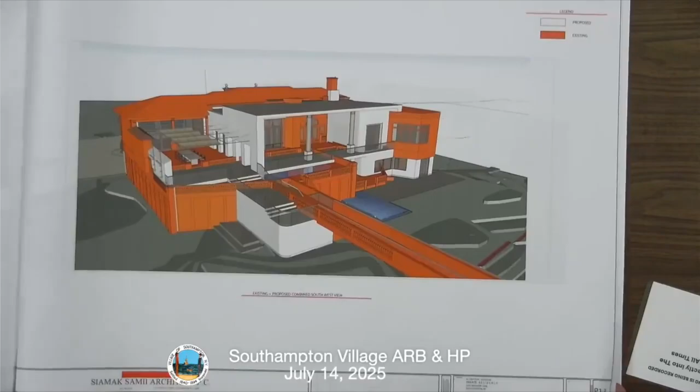Nothing's expanding in the footprint of the house. These are all within the existing footprint. Just for context, I have an existing photograph of the rear of the house here, which is a hodgepodge of all sorts of windows and railings and shapes and forms.

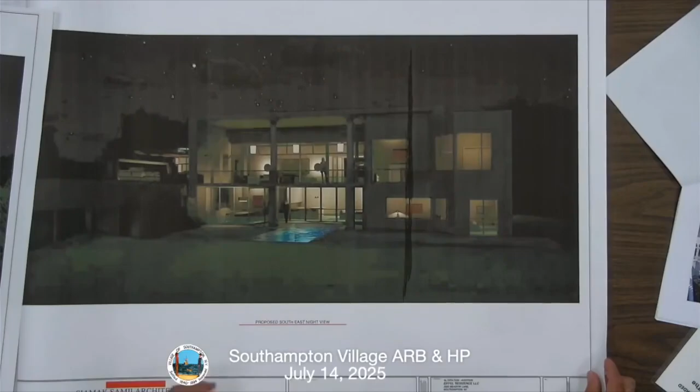I know at the time, Mark, you had asked me for a night rendering, which, if you go to the last page, actually one before the last, is that night rendering of the property. This print isn't the best, but that's what it is. What really architecturally changes is that the pool is coming down from the upper deck to ground level, with some very minimal room expansions underneath that porch, about 400 or 500 square feet.

Both versions that you reviewed at the time, you liked both, but of course the client wanted the pool at ground level because it provides more protection from wind and sun. A portion of this pool is actually underneath the porch, so it provides shade and also privacy from neighbors.

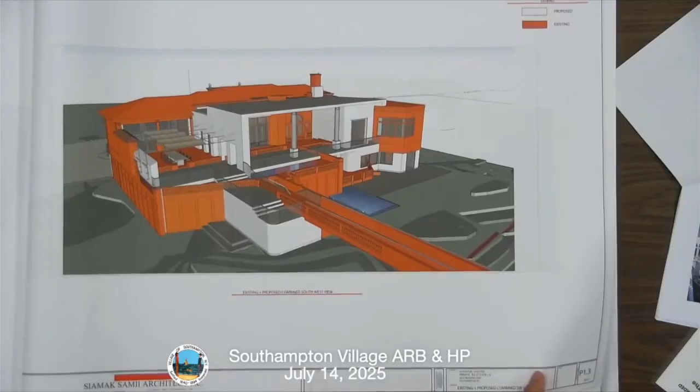Okay. Yeah, I have a lot of information here. I'll be happy to be more specific if you want. I can direct you towards that or define what you need to see. I actually just found it. Okay, we're good, not my question.

Board members, I have no objection. I understand you're working with, as you said, a hodgepodge, very difficult situation. Putting the pool down took away some of the intensity of the back, which I always felt didn't have anything to do with the front, but I'll leave that. So what, there it is. At night it looks okay.

Nina, comments? Yeah, I think it's okay. A lot of glass added to the south, which is okay in terms of where the pool is and the energy. I think you've done a good job with what you had. Thank you, it actually makes the back of the house make more sense now, and the rhythm of the back is more pleasing. It makes more sense, and I think it's fine.

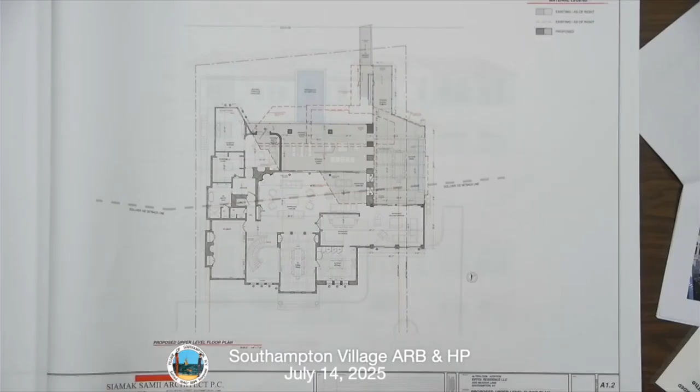Any comments from the public? Okay, it's an empty room. So, motion to accept the application for 2020 Meadow Lane based on drawings stamped June 12th, 2025. Is there a second? Second. All in favor? Aye. There you go.

Thank you very much. Now, do not come back. I'm going to go get myself a glass of scotch. One of those houses that never goes away.

Okay, yeah, the last one is 35 Lee Avenue, Sandkit LLC. Do you have affidavits, and are they in order? Is anyone coming on Zoom? I'm assuming they are. Okay.

Hello? Oh look, it's Brian Brady. Is that correct, Brian, is that you? Coming up, maybe. Thank you. Oh, you're welcome. I like this house, actually.

Okay, can you hear me now? Yes, yes, okay, we can see you. I'm Brian Patrick Brady, I am the architect for 35 Lee Avenue. Can you give yourself any more volume there, Brian? Get closer to your mic. Is that better? Yeah, that's a little better, thank you.

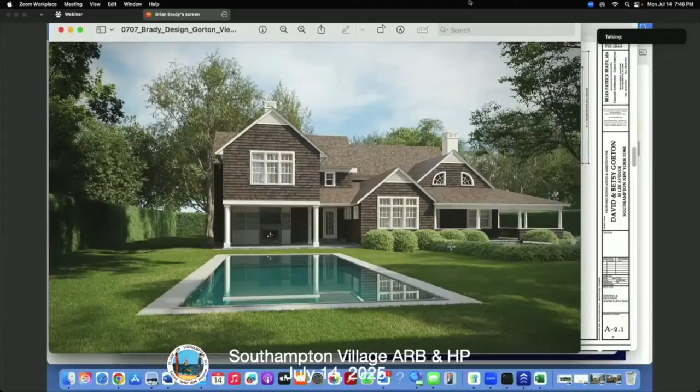I have a question. On page A24, your west elevation, talk to me about the roof line. Is the double peak roof line there to keep it subservient to the ridge line? Yes. Okay.

Board members. I thought you did a nice job. I love the covered porch. I kind of like the slightly fancy details of the light, and I think you added to the neighborhood. Yeah, it seems much improved compared to what it was. I definitely think the garage looks more in keeping with the neighborhood, the garage doors.

Nina? Yeah, I mean, my original reaction was a little bit - just from the drawn elevation, seeing the roof slide all the way down was sort of the architectural move of the house. It's sort of hidden here in the photograph by this hedge, but I kind of appreciated that. Just so that's completely eliminated here, which I can understand.

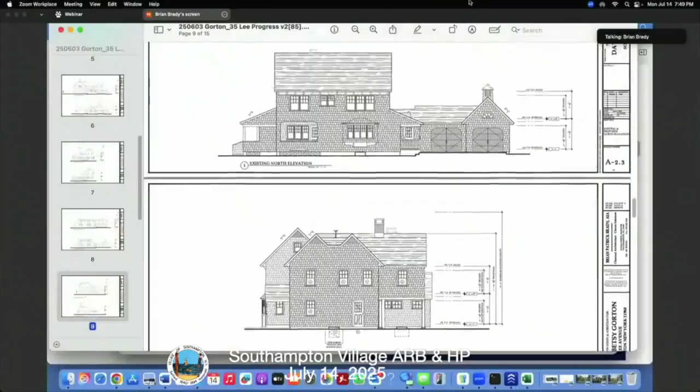Can you talk to me about the glazing pattern in the eyebrow window, in the attic? I guess it's the third story, like attic window - it looks like a diamond glazing pattern in it. In the rendering, yeah. My client wanted to have something of interest up there, and we don't have shutters on the house, so typically I would just do shutters, so we introduced this diamond pane.

This is actually rendered incorrectly - it will be more like a fan light. Looked weird to me. Yeah, I agree, because it's picking up - these are existing, and I don't like them at all, so I got rid of it. But that was sort of tying in with what was existing on this side, because it's in the same room. I understand Nina's point about symmetrical. I don't know how you would accomplish it here, but I understand where it's coming from - not enough to stop me, but I understand the point. And putting a fan light in the eyebrow window makes more sense to me. Okay, thank you.

Okay, any comments from the public?

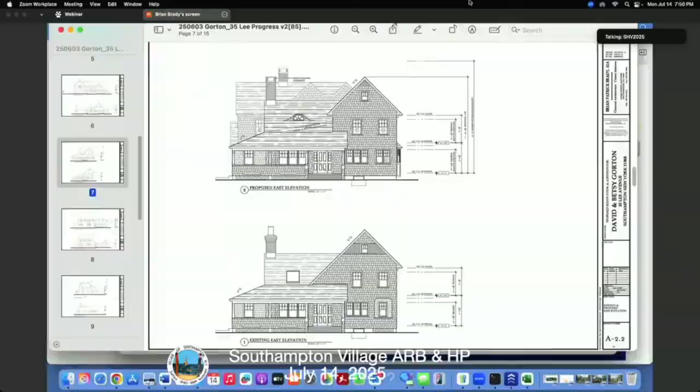Thank you, Brian. Thank you.